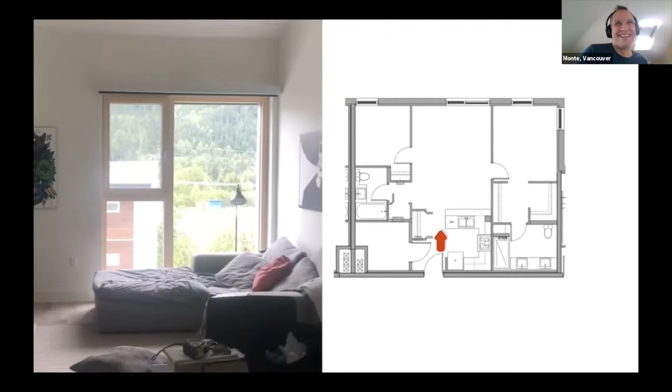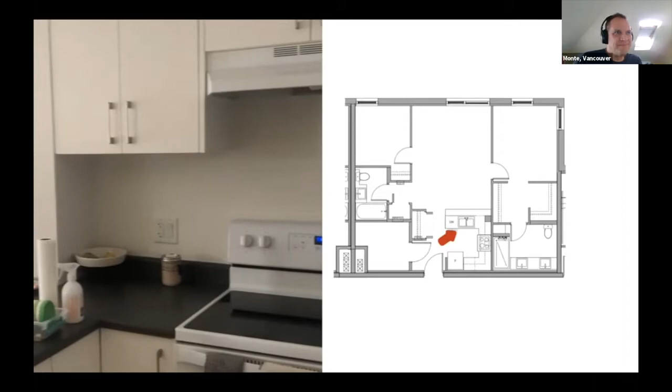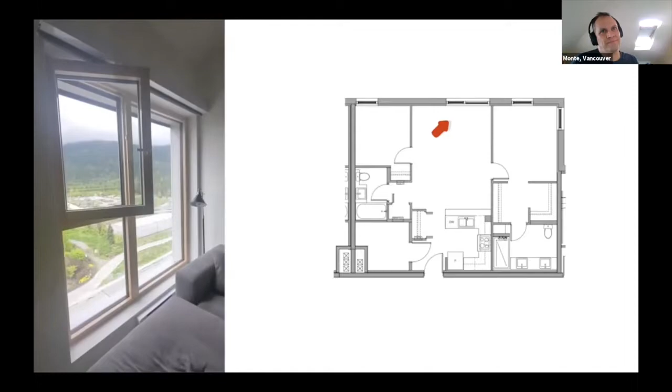Starting from the entry, here's a basic rundown of a standard unit. The kitchen has an induction stovetop with a recirculating hood, complete with a built-in grease and carbon filter. Hidden within the kitchen wall bump out is the plumbing stack with 2 inches of pipe insulation. The windows beyond are similar to the door, but function on the tilt and turn operations. Below that is the electrical baseboard for supplemental heating.

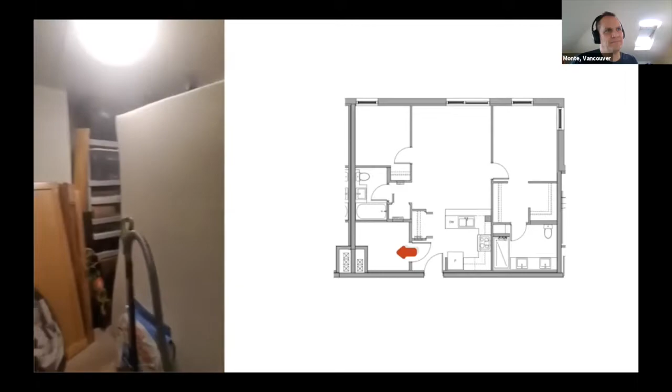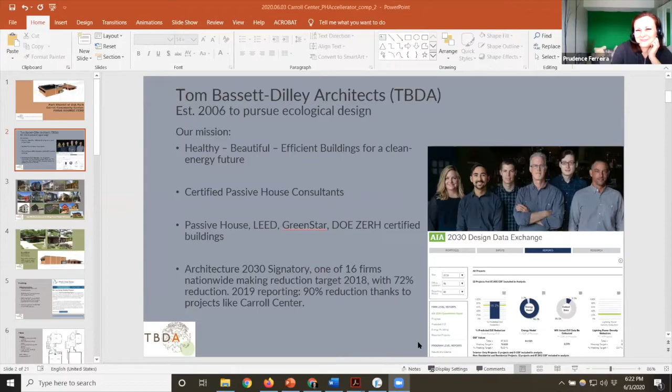There we go. Success. I got it. Thank you. Sorry. No worries. Slide. Okay. I'm on a wide format too. I hope that works for everybody.

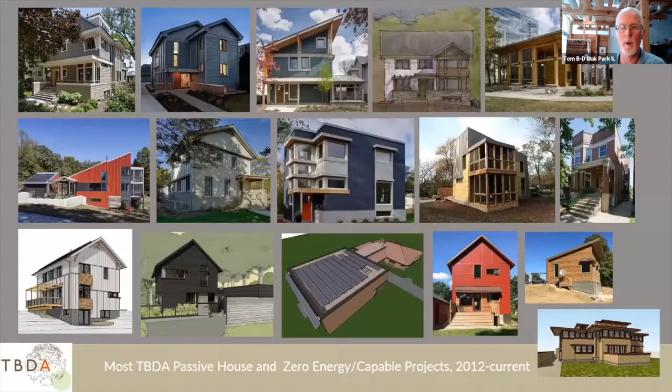So anyway, this is our kind of 2030 for 2019. We're really excited by this. We're inspired by it, and fortunately, we have clients who come to us asking for it. So as a 6-person firm, it's our focus. It's what we live and breathe. This is just a snapshot of most of our net zero and passive house projects in the last 8 years or so. The bottom right corner is one that we're really excited about, which is just coming on board, a retrofit of a Frank Lloyd Wright house here in Oak Park.

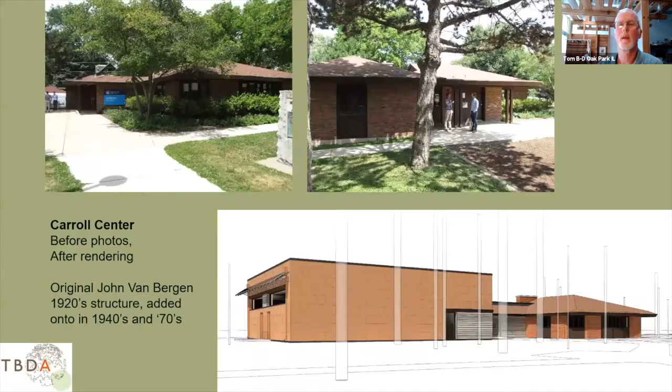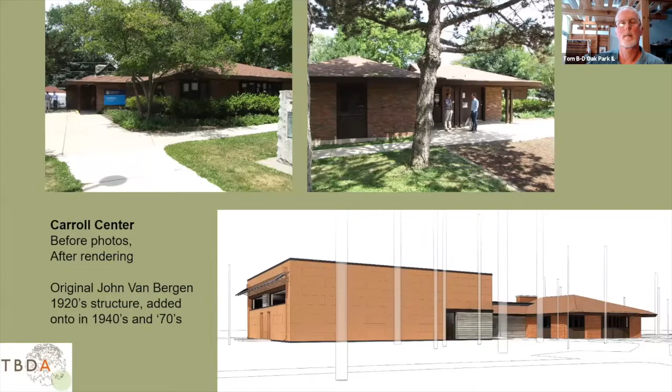All right. So the Carroll Center is a community center in Oak Park. It's a little building that was originally built in the 1920s, designed by John Van Bergen, who was a Frank Lloyd Wright employee, and then went out on his own and did Prairie School buildings. Then it was added on to in the 40s and the 70s.

So there's kind of a mishmash of things that we were coming into. The rendering in the lower right shows the big addition off on the left there, which is our project. The owner started by saying, listen, we need an addition here, and we want to keep the budget down. So we designed a down and dirty addition, got the bid, and then they took it to the board, and the board said, yeah, but can't we do better?

Because we had done a project for the Park District 4 years before that's a near net zero project that the community loves and the board is proud of. And so we got together with the Park District again and said, hey, the Illinois Clean Energy Community Foundation grant might be the ticket here. So this is a pretty amazing incentive program that we have in Illinois, because ComEd, the big utility, I think they sold a power plant, they had like $225 million that had to go back to the public. So they did it via this endowment that funds more energy efficient design.

About 4 or 5 years ago, they decided to take it from just funding LEED projects to making it net zero. If you're going to get the big grant from them, you have to make a net zero building. So they give you like 60% of the money during construction, but the last 40% comes after you've proven a year of net zero energy. So the pressure's really on to deliver, and you have to choose a third-party certification, ILFI or PHIUS, and so we did PHIUS. So we got pre-certified, and one of the big reasons for that is the quality control that goes into checking the energy model, checking the construction, and knowing that the building is going to perform the way we think it's going to perform.

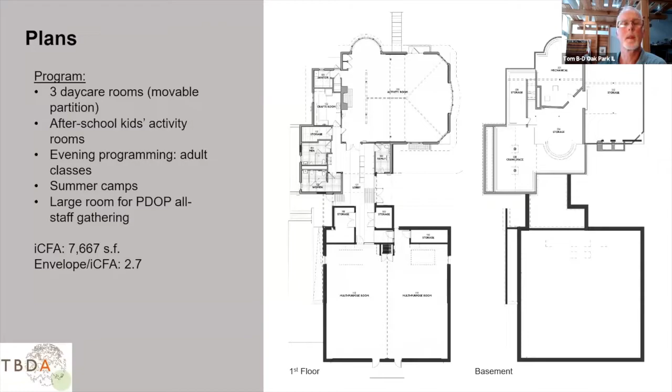So this is how we did it. The new construction is basically concrete block painted on the inside. Simple, cheap, durable. And when you think about the perfect wall from Building Science Corp, this is pretty close to that, isn't it? We've got an air control layer on the outside of that, which is the fluid applied, the orange stuff there. That's a Prosoco Cat 5 membrane, which Timothy will talk about in detail. He still has it, I think, in his clothes. It's still on my coat.

Yeah. And then we've got our thermal control layer outside of that, which is 6 inches of mineral wool insulation. And then we have our water control membrane on the outside of that, which is the siding. Although the Cat 5 is acting as basically our drainage plane, we're flashing all the windows to that. And then we're wrapping up and over with our air tightness. We put a piece of ZIP R, which is an insulated sheathing board, on top of the top course of block. And we basically extended our air tightness over the top of that and down, and our roof membrane is our airtight layer for the roof.

And so that's fairly straightforward, I think. I mean, having done a number of passive projects, there were details to work out, like at the sill was kind of tricky with moisture and whatnot, but we did it.

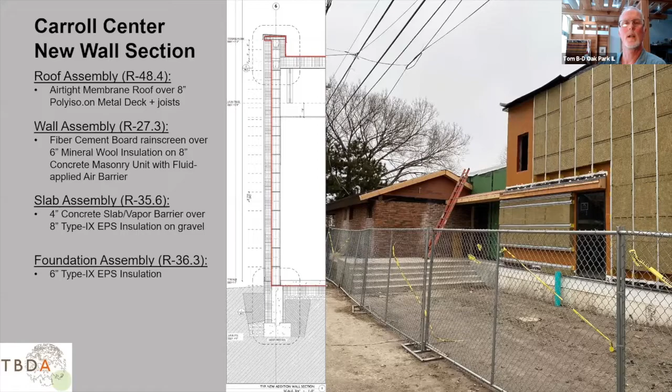And then on the retrofit, it's kind of a different story. And I just want to kind of go into this saying, like what somebody else said earlier, we've done a fair amount of these, but I definitely don't feel like we have all the answers. I think that we have a lot of gumption, which I think is like equal parts bravery and dumbness or something. It's like a fearless willingness to go and do things and try them out.

And we have made some mistakes, and I have presented to the Passive House conference about some of our mistakes and what we've learned. So hopefully we're not making too many mistakes here. We go to, you know, Building Science Corporation and all of you people in the community to learn and try to avoid it.

But so on the retrofit side, we initially went into this trying to figure out if we could do it with cellulose, and realized pretty quickly that we had so many ins and outs that we decided we would retrofit this with spray foam. And so we sistered down the rafters, which are 2x4s, with 2x8s. And that allowed us to straighten out the ceiling and account for the deflection, leave the deflection alone in the rafters that are there, sister on. That gives us over 8 inches of closed cell.

And then the wall assembly, we cross-furred. So on the inside face of the 2x4s that existed, we put horizontal 2x2s at 24 on center. And so that gives us something to attach the drywall to, but it creates a thermal break. So the studs aren't coming all the way through. We got a 1.5 inch cover over them.

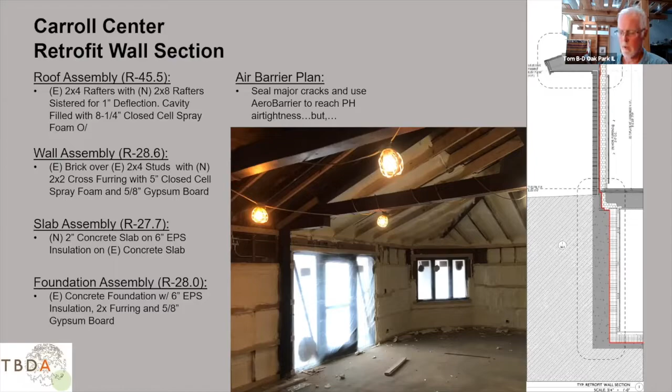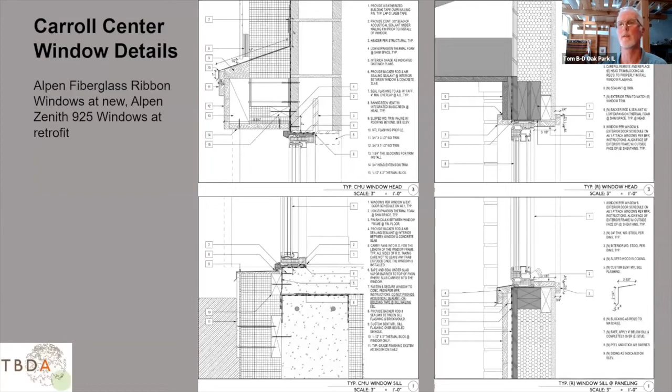I'm going to move quickly here. These are window details we can come back to. We used Alpen windows both at the new and the existing, different ones based on what we needed. For mechanical systems, we used a geothermal or ground source heat pump. It has a high COP, which is nice. And that lets us do all the heating and cooling with our ground source. Ventilation is with the RenewAire unit. That's our energy recovery ventilation.

And then domestic hot water is very limited. There's just a couple of bathrooms. They're not used a ton. So we just use a simple electric water heater for that. And then we need to get to zero energy, right? So we put a huge array on the roof, and our client, Chris, you're listening, I'm sure, he is just an absolute hero in the village and in the region. He's been outfitting Park District with solar for years.

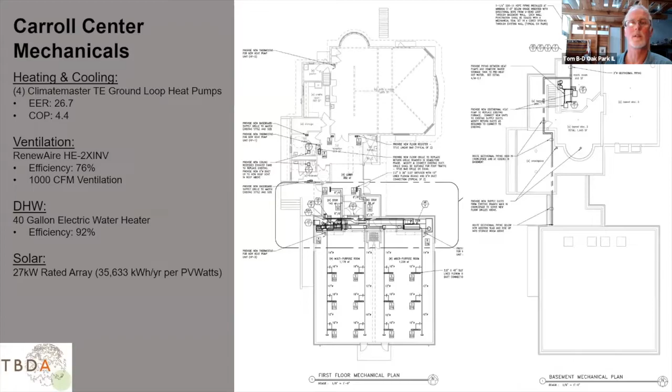And so we're actually going over and above what this building needs, because here's the thing with that grant. We got to make sure we hit 100% or we don't get the last 40% of the money. But also, by overproducing a little bit, we're working out an arrangement with ComEd to see if we can kind of treat the overproduction as community solar, basically. So anyways, it's a 27 kilowatt rated array. It's a bunch of power, 79 panels. You'll see them here in a second.

So here's WUFI Passive. I'm not going to delve into this too much. Pretty complicated utilization pattern. We had to get in there, all the kids at the different times and adults at different times, evenings and weekends. What we learned from our previous project with Park District is that, as we all know, there's no such thing as a net zero building, just buildings that are used to be net zero. So you have to really be careful about your utilization, and you have to be conservative when you're using the building, or else you could throw that off.

You'll notice the one red X on heating demand. This was one of the last projects that was allowed to have, or I think you need to have all green check marks now with 2018, but we were allowed to have one that didn't quite meet at the heating demand, and this sprawling building definitely made that a big challenge.

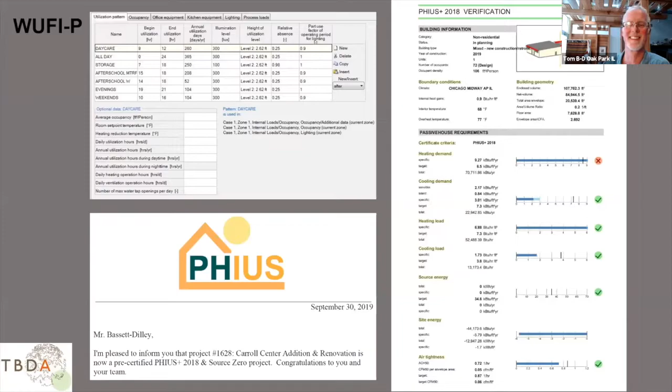So we got pre-certification on my wife's birthday in 2019. Nice birthday present.

All right, now we're going to dash through some construction photos. I'm going to turn it over to Timothy to take you through, because I should just say before we do that, the Park District, we went out for bid for this, and we got those kind of like, oh my God, bids. And they asked us to construction manage it. And we said, well, listen, we haven't done that before. We'd love to, because we've worked with you a lot, and we have a great relationship. We negotiated how that would work and what we would do and what we would not do. We're not taking builder's risk insurance, et cetera, but we're lining up the subs.

And then, of course, what happened was Timothy became the instrument to this being a successful passive house project by looking out for all those details that so easily can get missed, particularly the air barrier. So anyway, Timothy's training is architecture, but he's one of those rare individuals that goes very smoothly into the field and into the office. So anyway, Timothy, take it away.

Thanks, Tom. Just on that note, I want to take a quick moment to shout out to Chris Lindgren. Every great project starts with a great owner, and Chris, it's been great to work with you in the Park District of Oak Park. Thank you for being an advocate for causes like this, where firms like TBDA can build great projects. So Tom did a great job breaking down the nuts and bolts of the drawings of the project. We're going to dive into some of the construction photos.

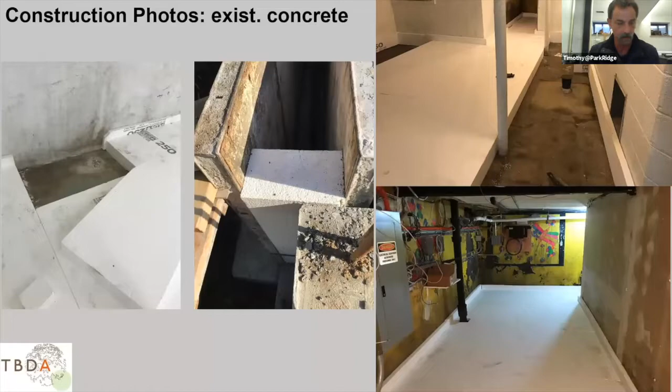In the middle, you can see a photo of insulation preventing a thermal bridge. That's an exterior uninsulated foundation retaining wall at the intersection of our building. So it becomes very critical when the concrete guys are pouring to have all that foam on site and make sure that it's all there, because if it's not there, the thermal break isn't happening.

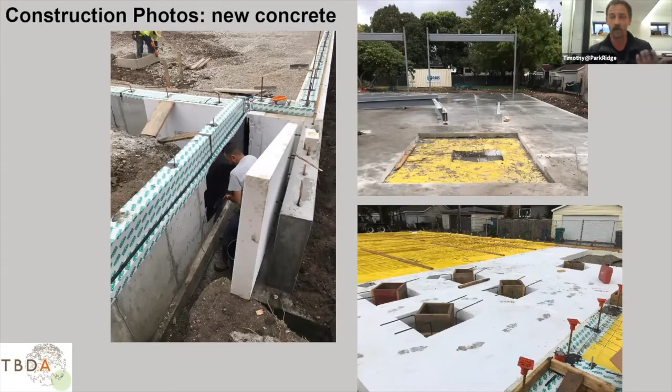And then the other photos on the right, you can see there is actually a pier there that was not located properly. So we had to cut back to the control joints and make sure that the pier was located properly. I located it properly with the concrete contractor the morning of. And then when I came back, he fell back to an old set of drawings. Things happen in construction. But the point is we got past it. It got insulated properly. The Stego Wrap was continuous and life goes on.

Tom started to talk about this before, but I think this is probably of interest to some of you. When Tom first approached me about this project and being the construction manager, the thing that I was most scared about was the air barrier. I've worked for him for long enough to know that consistency in the air barrier is important, along with consistency in insulation. But on an existing building such as this, we're stuck with a bunch of conditions that we have to deal with.

So originally, the air barrier strategy was to use an aerosolized product called Aero Barrier. I met with the local individual on site a few times and we talked through it. He let me know that because Aero Barrier is a proprietary product, it's very expensive based on the amount of product that you use to fill in the gaps. And so with this building, with the shiplap sheathing that was present on the walls and on the roof, the amount of material that was expected to have to be paid for to fill all these gaps was going to be astronomical. So we had to do something that we don't like to do.

I've learned working for TBDA, Tom never really likes to use closed cell spray foam or spray foam as an air barrier. And in this case, we really didn't have much of a choice. And frankly, doing a building like this, part of this is education and seeing how things work. We moved forward. We talked through it. We looked at AHR values. We talked to some other consultants.

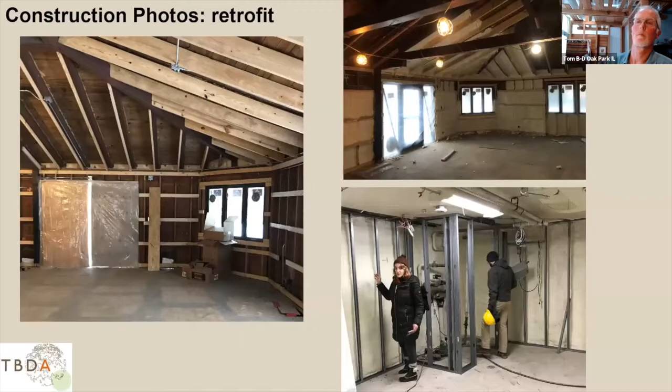So at the end of the day, we got some photos here. Yeah. These are a few photos of the frame connection of the old and new. It's a great concept, because one of the great things about this project is that not only are we preserving an old building that's worth preserving, but we're literally branching out and attaching it to a new structure. Mostly the idea of the new framed connection was it's a ZIP sheathing air barrier. ZIP sheathing is great to work with. You can see a bunch of the tape there, but they also have a great liquid ZIP product, which came in very handy on this project.

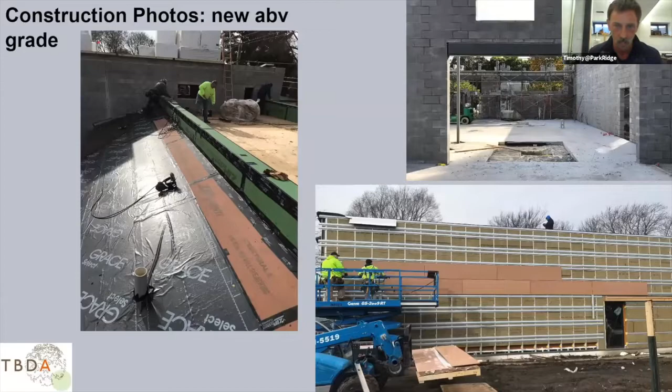The other photos, you can see the connection to the rough CMU box there. We're going to get into photos a little bit later of how we dealt with the air barrier there. And then you see almost at the end there where they're putting the final cement board panels over the horizontal hat channels, over the Cascadia clips with the Z's on the exterior insulation. So you're starting to see the building take shape there. This is just a little bit of a breakdown of some of the trials and tribulations of trying to make an existing building airtight. It is doable.

It's a daily battle. It's something that you need to have conversations with your subs about and make them aware of: I need to do this before you do that, because if you do that, I can't do this.

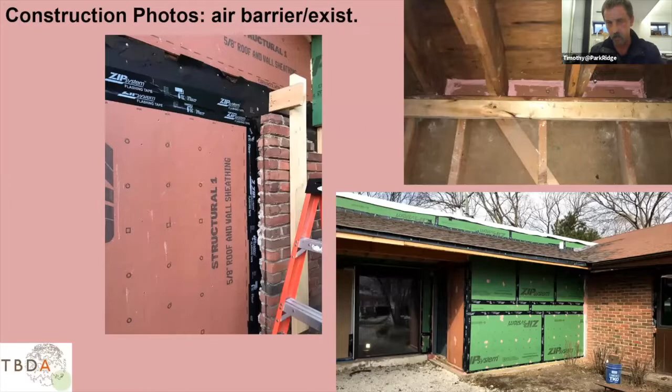And then the bottom right photo you can see is a little bit more of the air barrier construction of the old to new. You can see the brick wall there on the right, and then it's the zip sheathing that's all taped, and the roof is there, and you can see the parapet, and that's actually the main entry of the building there.

This is Chris Lindgren. I know you're smiling right now. Another shout out to Chris.

We did the Cat 5 air barrier on the CMU. I know a lot of you guys are really into this stuff. I will say Prosoco has a great team. They're amazing to work with in the field. Everything that they say on the website about them is true from my experience. They go above and beyond and out of their way. The problem on this particular project is that the CMU as a substrate for an air barrier is way too porous. It took more coats than we were told to get the wall coverage.

And then you can see there in the photo in the middle, that is the continuation of the air barrier transferring up to the framed cap that Tom mentioned before. So essentially the CMU wall goes up. We put joint and seam filler at the connection between the CMU wall and the zip cap. And then that's the zip tape that's indicated there, essentially making an airtight connection of the TPO to that framed buck that we're using at the top of the parapet.

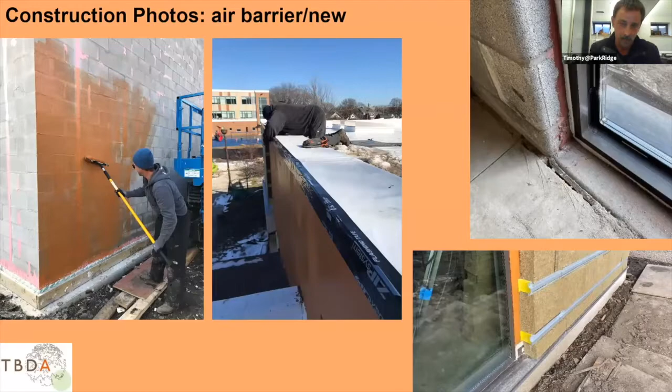A couple of the other photos there: you have the air barrier at the wall, but you also have the air barrier at your windows. So you can see the FastFlash coming in there on the interior, and then you can see the AirDam, which spans the gap from the window frame to the FastFlash. So there is backer rod back there to span the 1/2 inch gap, and then that's AirDam, which is also another great product from Prosoco.

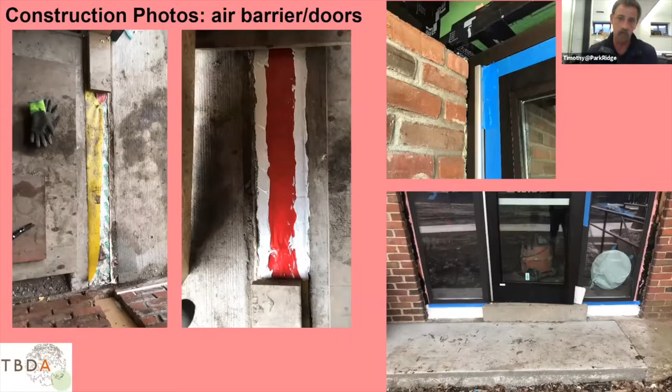The other two photos are great photos of the existing building, trying to get that air barrier as consistent and thorough as possible. One of these is showing the aluminum storefront, and essentially what we ended up doing here is putting a buck on the framed wall so that we were able to use a can of spray foam to create consistency to then apply the fluid applied air barrier at that jamb. And the other photo is a tricky sill connection, which once again is just simply Prosoco products gooped in there to really just protect the building and create continuity in the air barrier.

We made it. This is one of the better days on the project. I have to admit, I lost sleep before we got this first blower door test. There's just no way of knowing as you're working through construction.

But anyway, we hit our targets without having to use the aero barrier. And that was an amazing day based on all the hard work on a daily basis that we did to get the air barrier to work.

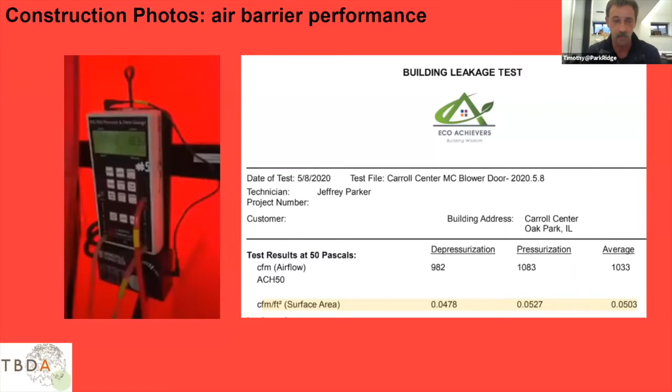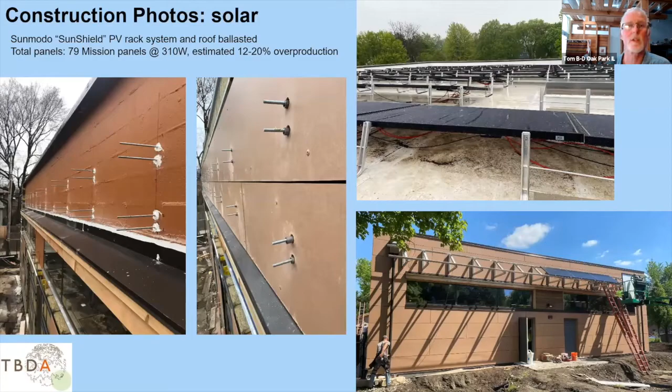Yeah, Sunmodo is the company that makes these PV racks. They call them SunShield. But normally you're just going to attach that to a wall, but we had 6 inches of insulation that we wanted to run continuously there. So we worked with our engineer to come up with this threaded rod connection. So that's how that worked.